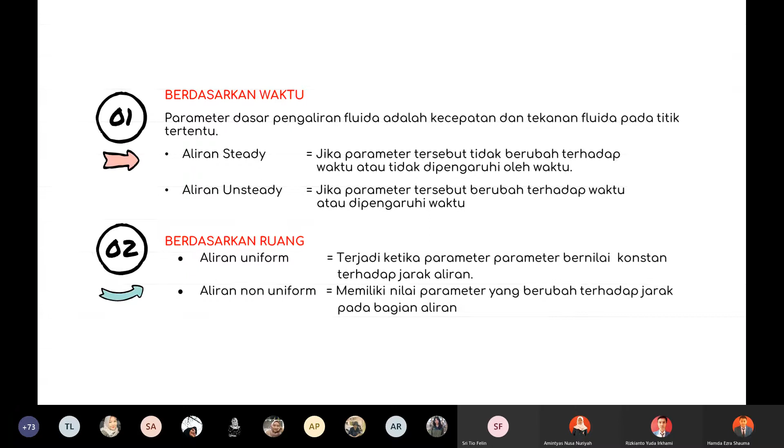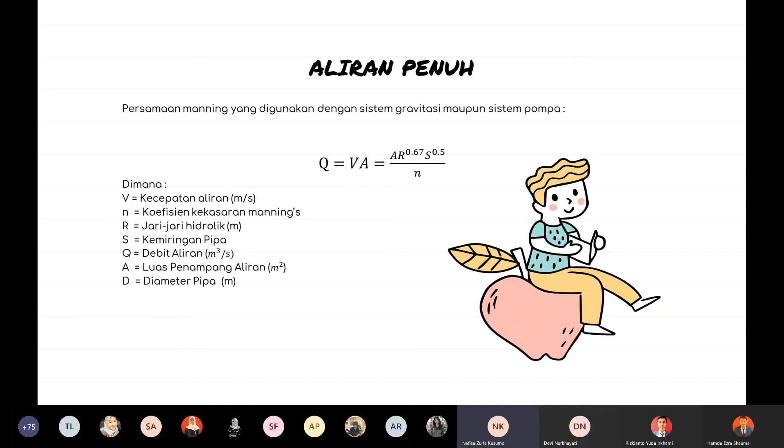In full flow, the formula for velocity and flow can be seen as follows. V is equal to 0.397 multiplied by S to the power of 0.5 and multiplied by D to the power of 0.67, then divided by Manning's coefficient. Q is equal to 0.312 multiplied by S to the power of 0.5 multiplied by D to the power of 2.67, then divided by Manning's coefficient. Flushing shall be designed so that the flow rate is not less than 0.8.

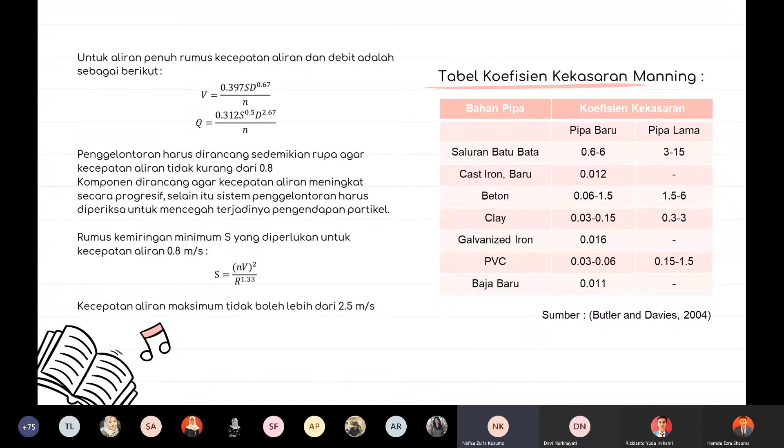The components are designed so that the flow rate increases progressively, and the flushing system should be checked to prevent particle settling. The formula for the minimum slope required for a flow rate of 0.8 meter per second is S equal to n squared multiplied by v squared, divided by R to the power of 1.33. The maximum flow speed shall not be more than 2.5 meter per second. On the right side, you can see the Manning-Roughness coefficient table based on Butler and Davies' book.

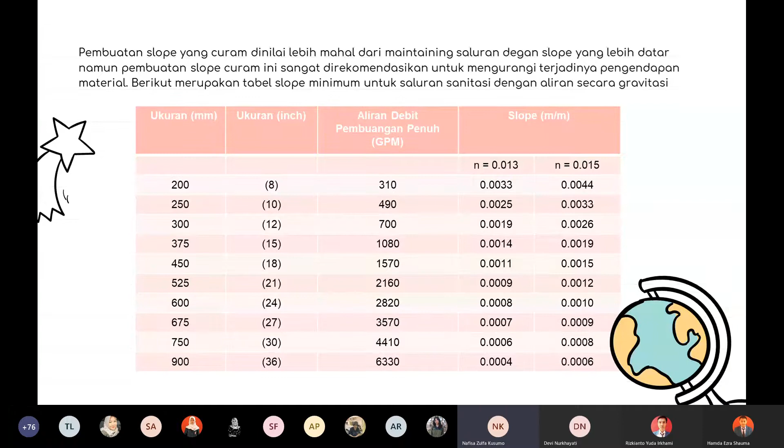Calculation of the average discharge and average velocity in this flow can be analyzed with the Manning equation. Factors that influence the measurement, such as the determination of A, P, and RH values and the roughness of the Manning coefficient, are considered based on the ratio of flow depth to diameter.

The spreadsheet graph illustrates the measurement of the trigonometric geometric equation for wet cross-section area, wet circumference, hydraulic radius, and top width measure. This measurement is popularly used in partially full pipe flow analysis. Full volume and full discharge are calculated at full flow condition in pipe by the Manning equation. Then V and Q can be found from various flow depth by reading the graph values.

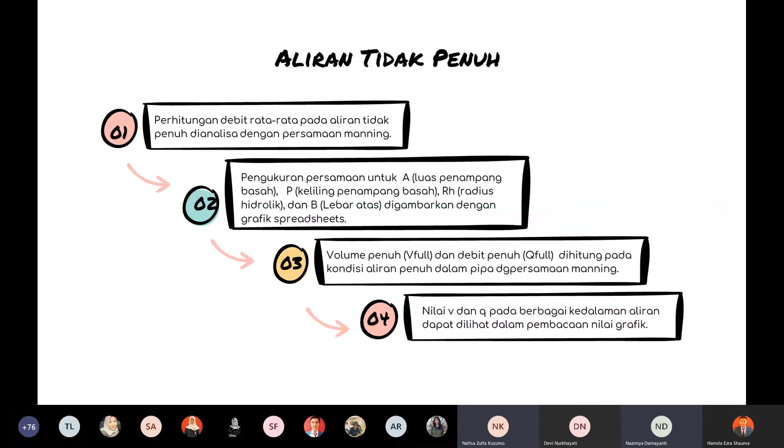For example, a water pipe with a diameter of 300 mm flows half full. We are told to specify the value of D, A, or wet cross-section,

top width, and dm. D is equal to 0.15 meter. A is equal to pi multiplied by D squared and then divided by 4. After that, multiply the result with 0.5.

From the formula, we know that A is equal to 0.0353 meter square. P is equal to pi multiplied by D and then divided by 2, which is equal to 0.471 meter. R is equal to A divided by P.

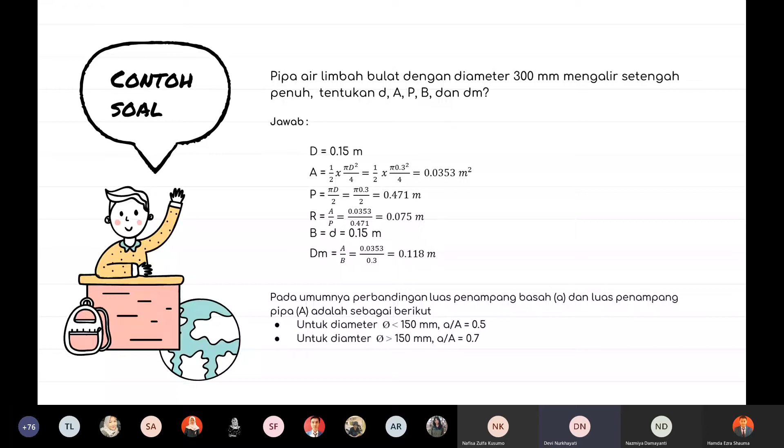The result is 0.075 meter. B has a value equal to D of 0.15 meter, and for Dm, equal to A divided by B, is equal to 0.118 meter.

Okay, next is about energy loss. Energy loss can be described as the change in flow velocity in the outlet pipe. The energy loss equation can be seen on the screen, which is energy loss equals 1.0 multiplied

by the average velocity to the power of 2 divided by 2 multiplied by gravity, minus channel velocity downstream to the power of 2 divided by 2 multiplied by gravity, where V means the average velocity at the outlet pipe in meters per second.

If the channel velocity downstream is equal to 0, as in the reservoir, the energy loss value is equal to the velocity value. In the case of an outlet pipe equipped with a shut-off valve which functions to prevent backflow to the system, the energy loss due to the valve also needs to be taken into account.

However, information on the shut-off valve is required from the pipe manufacturers. For partially full flow, energy losses can be reduced to nearly zero.

Next, about energy loss due to the pipe bends. The energy losses caused by bends in the pipe are minor energy losses which can be calculated by the equation: energy loss due to pipe equals 0.0033 multiplied by delta multiplied by initial flow to the power of 2, divided by 2 multiplied by gravity, where delta is the bend angle of the pipe.

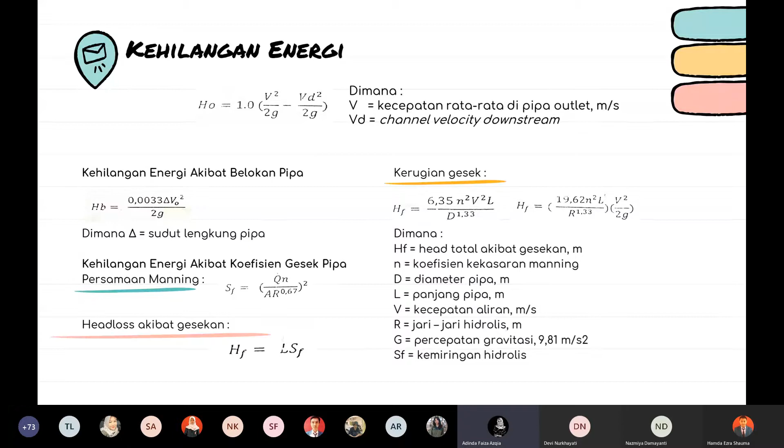Next, I'm going to present about gravity flow domestic wastewater pipeline. Gravity flow is a method of flowing domestic wastewater in pipelines by utilizing the energy difference from the elevation difference between the upstream and downstream points of the pipe. The difference in elevation is designed by adjusting the pipe slope so that the domestic wastewater in the pipe can flow at a certain speed.

The discharge of domestic wastewater in the pipeline is highly dependent on fluctuation in domestic wastewater flowing in from the source. Therefore, the piping network must be designed to meet the condition of minimum debit, average debit, and maximum debit. Gravity flow domestic wastewater pipeline will only be planned under partial condition or with a ratio of 0.6 to 0.8.

This is done to ensure that there is still enough airspace above the surface of the water so that atmospheric pressure is still available and to prevent excess capacity that can result in the overflow of domestic wastewater through manholes or inspection holes. As explained before, this method uses the Manning equation as well. Next.

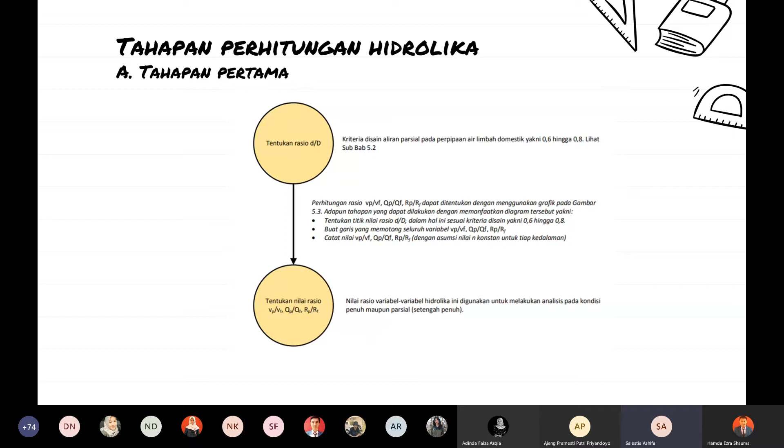Next is the hydraulic calculation, which is divided into two steps. The first step is we have to determine the d/D ratio and then determine the ratio of velocity in partial condition and velocity in full condition, ratio of flow rate in partial condition and flow rate in full condition, and ratio of radius of partial condition and in full condition. Next.

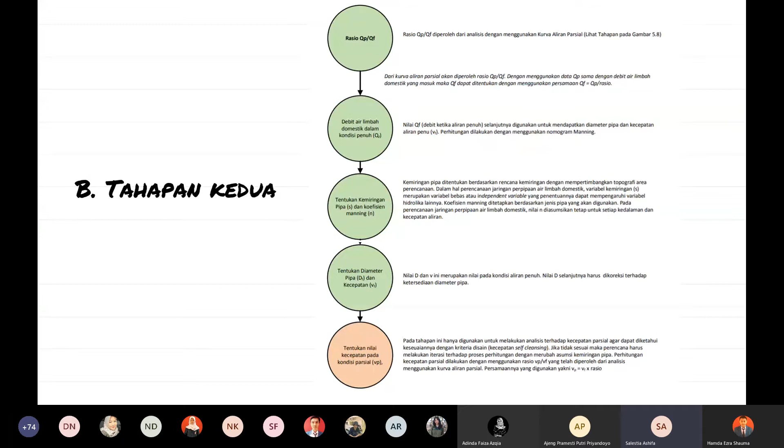And the second step is we have to determine the ratio of flow rate in partial condition and full condition, and determine the flow rate of domestic wastewater in full condition, and then determine the pipe slope and the coefficient of Manning equation, then determine the diameter of the pipe and the velocity, and then determine the velocity in partial condition. Next.

This is the nomograph example. Here, it is known that the quantity of flow is 0.6 cubic meters per second. The pipe length is 130 meters and the pipe diameter is 875 millimeters. So how to find the slope and the time of flow to the next station?

First, what we should do is mark what is known, like the quantity of flow, pipe length, and pipe diameter, and then draw a straight line from the quantity of flow line until it reaches the velocity line. After that, record the numbers that the line crosses. Here, we got the slope, which is 0.005, and the velocity is 1.8 meters per second.

After that, draw the line again from velocity in pipe across the pipe length to time of flow to next station, or delta TC, and then record the time of flow, which is 1.4 minutes. Next.

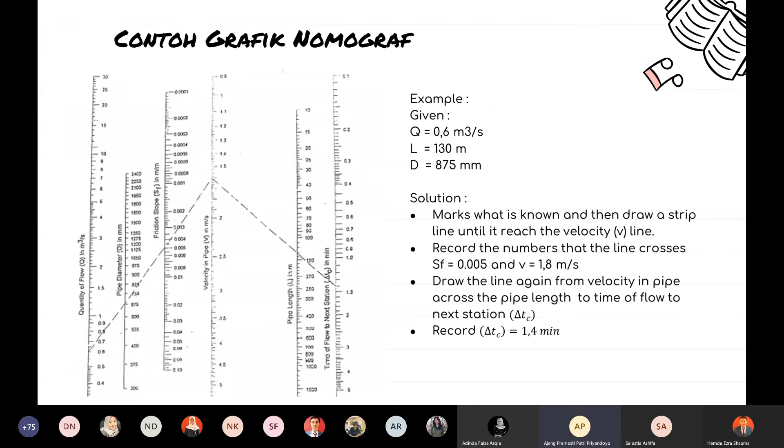Okay, this is an illustration of the flow of domestic wastewater through a pressurized sewer. Pressurized sewer is one of the methods of domestic wastewater disposal that can be selected in the planning of the service subsystem and collection subsystem. This method can be selected for certain service areas which technically cannot be flowed by gravity due to the lower topography of the main pipe.

The pressurized flow method operates by using a pump to push domestic wastewater from the collection tank to the nearest domestic wastewater pipeline. In its operation, domestic wastewater from the source is flowed by gravity to a collection tank, which also functions as a pumping station. Furthermore, the pumping of domestic wastewater is carried out based on the elevation of domestic wastewater in the collection tank.

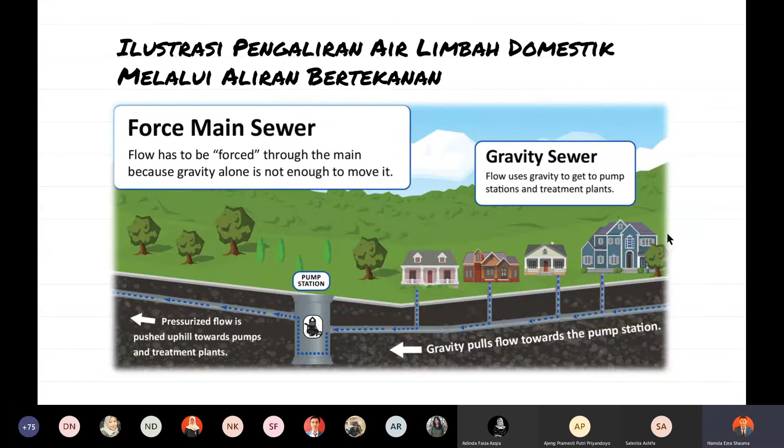Next is the Hazen-Williams equation. The hydraulic analysis of the pressure flow pipe can be carried out using the Hazen-Williams equation. This equation was developed to relate the physical characteristics of pipe to change in pressure due to friction between the fluid and the pipe. There are two equations. Equation 1 is used to calculate the discharge.

The discharge is equal to 0.278 times C times D to the power of 2.63 times S to the power of 0.54. In this formula, C is the Hazen-Williams coefficient, D is the inner diameter of the pipe, and S is the slope of the hydraulic gradient. Equation 2 is to calculate head loss, where L is the length of the pipe, Q is the discharge, and D is the inner diameter of the pipe. Next.

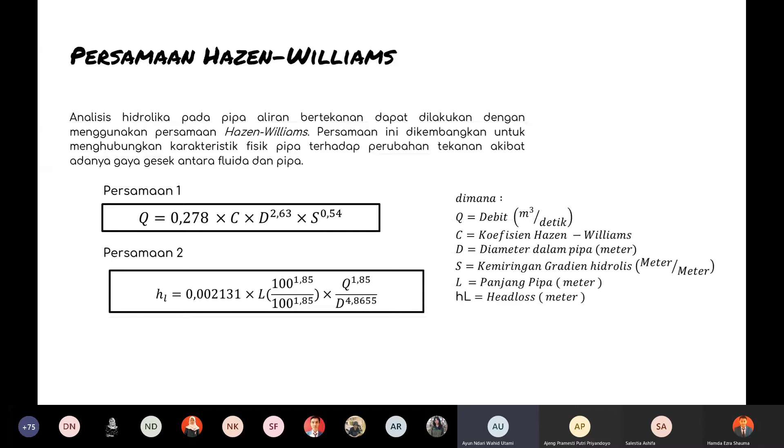Okay, next is the hydraulic calculation step. To analyze the Hazen-Williams equation with other C values, we need a correction factor, which we can see from the table above. Next.

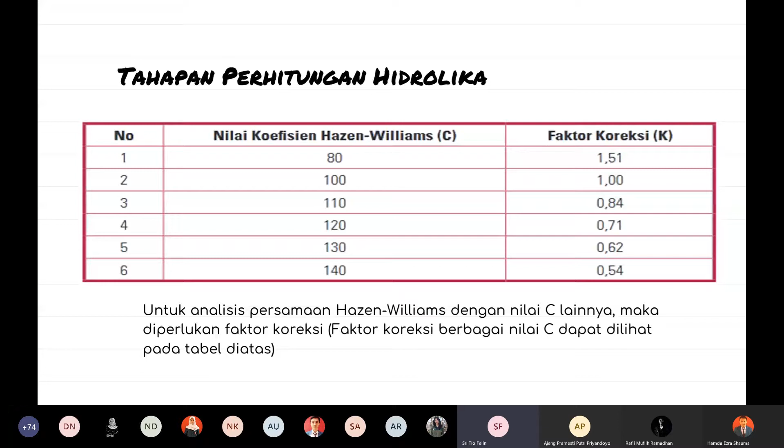And the steps for calculating hydraulics: there are two steps. Step 1 is determine the value of diameter or D, pipe or pump discharge or K. The analysis of hydraulic variables uses the Hazen-Williams nomogram, starting from determining the dimension of the pipe or discharge of wastewater and head loss. The pipe diameter for the pressurized flow can be determined considering the dimension of the outlet pipe on the available pump. In this case, the wastewater discharge is the pump discharge.

Calculation of head loss or HL, diameter or D, and velocity or V variables can be determined using a nomogram graph. The steps are: first, determine the point value of K; second, determine the point value of D; third, draw a line that cuts across the K, D, HL, and V variables; and the last step, note the values of K, D, HL, and V. And the final step is for velocity, diameter, or head loss. The values of the hydraulic variables that we get depend on the initial data that we used in our planning before. Next.

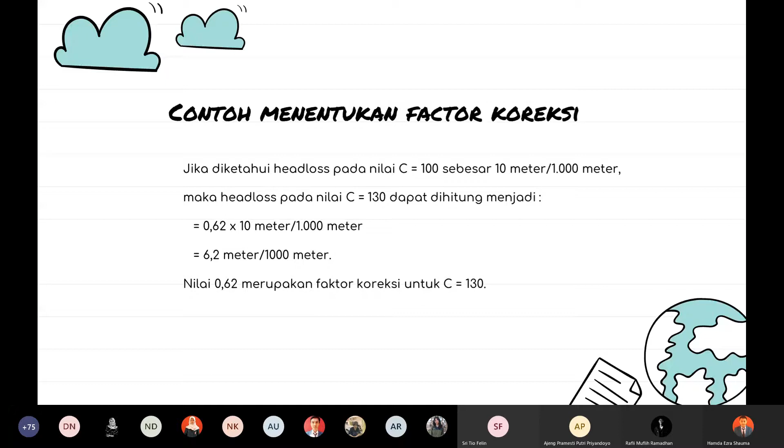Next is the pumping hydraulics material from the Metcalf and Eddy book. I will explain the fundamentals of pipe and open channel flow. The following terms are basic to understanding both pipe and open channel flow. Firstly, laminar flow. Laminar flow involves the mixing of fluid particles on a molecular scale so that when in motion, the fluid particles move in parallel paths under the action of viscosity. Secondly, turbulent flow. Turbulent flow involves the mixing of fluid particles on a molar scale so that in motion an exchange of momentum occurs between fluid particles, which results in the rapid and continuous mixing of the fluid.

Thirdly, pipe and open channel flow. The flow of liquid in a conduit might be classified as pipe or closed conduit flow or open channel flow depending on whether the free liquid surface is subject to atmospheric pressure. Fourthly, head loss. Head loss is the energy loss that occurs when liquid flows in the pipe and open channel. Fifthly, hydraulic grade line. The hydraulic grade line is a line connecting the points to which the liquid will rise at various places along any pipe or open channel if piezometer tubes are inserted in the liquid.

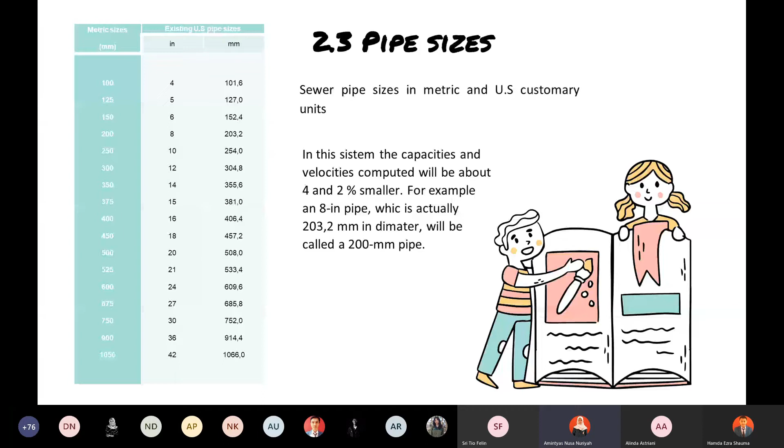And then these are design charts. The first is sewers flowing full. As mentioned previously, the Manning equation is the most common in sewer design. The most direct method of using this equation to solve problems in sewers and pipes in general is by preparing a nomograph. The values of factor n for Manning were selected for this diagram, so we can find diameter and velocity from the nomograph. This is one example of a nomograph. By following the design and drawing from the bottom and left side, we will get a meeting point. And from that meeting point, we get the diameter and velocity.

And this is sewers flowing partly full. Almost all sewers now constructed are circular in cross-section. The relation between hydraulic elements for flow at full depth and at other depths in sewers is computed according to the Manning equation. The hydraulic elements for circular sewers are the hydraulic radius R, the cross-sectional area of the flowing stream A, the average velocity V, and the rate of discharge Q. In the past, a wide variety of non-circular sewer sections were used, including egg-shaped, semi-elliptical, horseshoe, basket handle, oval, parabolic, and elliptical. Next.

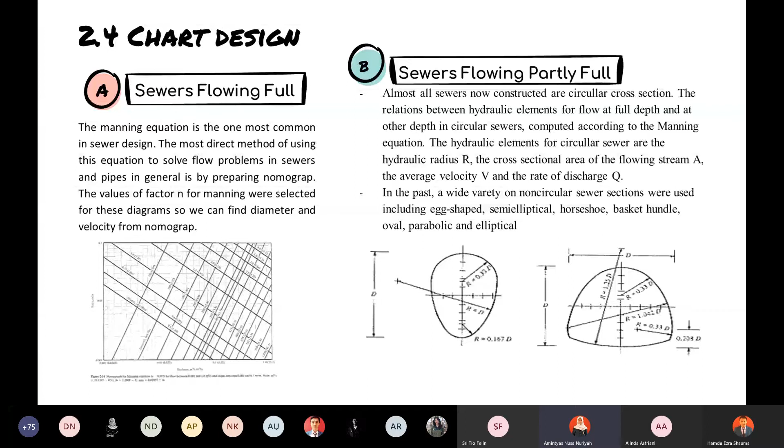So I want to do minor losses, or head loss minor. What is this? Minor losses, or head loss minor, are head losses in a sewerage system that typically occur where the magnitude or direction of the fluid velocity changes. Minor losses can usually be expressed as a function of the square of representative fluid velocities. Minor losses in closed conduits are somewhat different from those in open channels. So this is closed conduit flow minor losses.

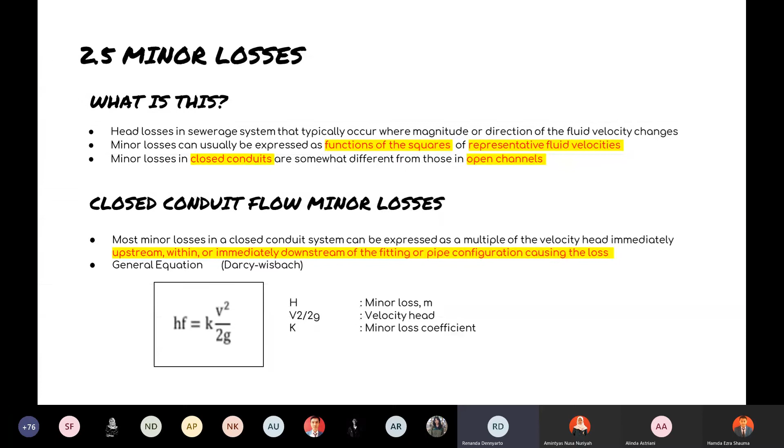Most minor losses in closed conduit systems can be expressed as a multiple of the velocity head immediately upstream, within, or immediately downstream of the fitting or pipe configuration causing the loss. So this is a general equation from Darcy-Weisbach, where head loss minor equals K times V squared divided by 2g, or gravity. Next.

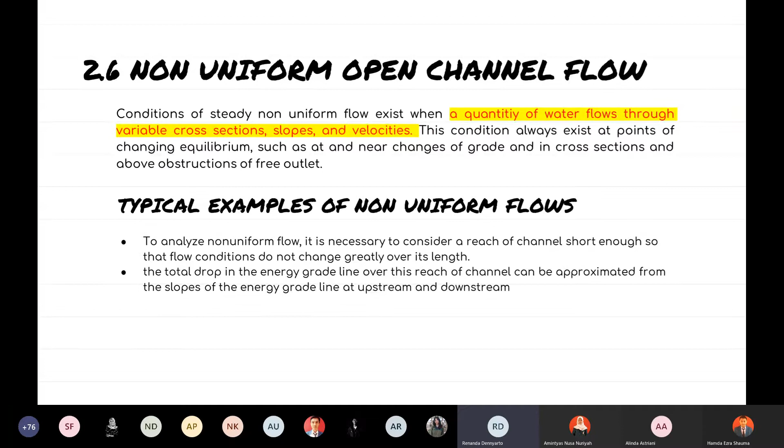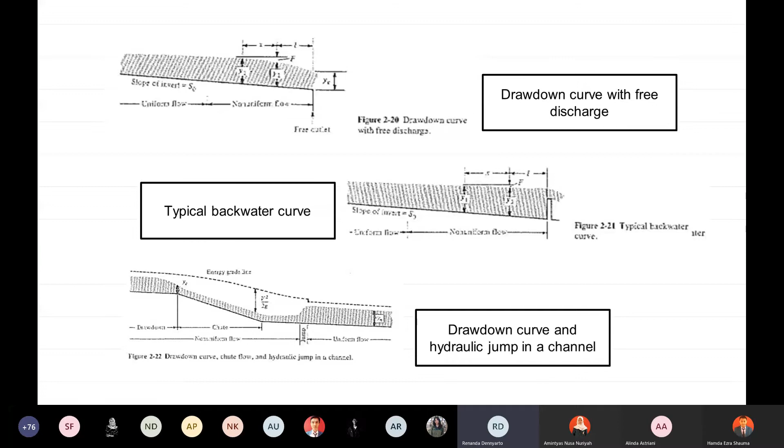Non-uniform open channel flow. Conditions of steady non-uniform flow exist when a quantity of water flows through variable cross sections, slopes, and velocities. This condition always exists at points of changing equilibrium, such as at and near changes of grade and in cross sections, and above obstructions or free outlets. So this is a typical example of non-uniform flow. Next. This one is a drawdown curve with free discharge, a typical backwater curve, and a drawdown curve and hydraulic jump in a channel. Next.

The first journal is Application of LabVIEW for Dynamic Simulation of Hydraulic Piping Systems. LabVIEW is best known as a programming environment for data acquisition and analysis and has reached broad use throughout the scientific and industrial communities. LabVIEW has gained experience as a simulation environment for dynamic analysis of piping systems with the method of characteristics, or MOC. Transient simulation of hydraulic piping systems consists of simultaneous solution of the 1D wave equation, that relates flow to the pressure in a pipe, and solution of all other non-pipe components constituting the total system.

The method of characteristics, or MOC, is the most widely used method due to its analytic accuracy and speed. This presents an implementation of MOC as a toolkit in LabVIEW. Each type of physical component, including pipe, valve, and others, is programmed as a component sub-VI, or component sub-virtual instrument. Hydraulic systems with virtually limitless complexity are then constructed intuitively using a point and click method in the standard LabVIEW interface and later run without needing any prior knowledge of LabVIEW.

The modularity means that new components and upgraded components are easy to incorporate, while the LabVIEW interface provides all the interactive graphical representation, both in batch mode and real-time simulation. This toolkit is implemented in a package called LVTrans, or LabVIEW Transient Simulation. Next.

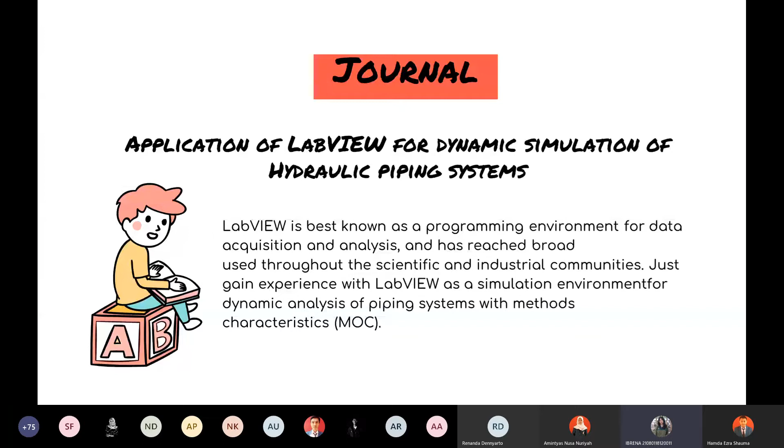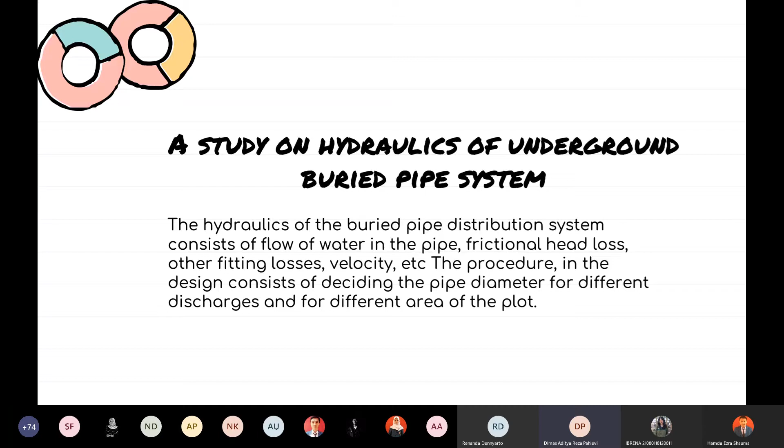Okay, the second journal is A Study on Hydraulics of Underground Buried Pipe Systems. For the design of the pipe system for water supply from buried pipes and for efficient irrigation, it is necessary to know the hydraulics of the pipe system. The hydraulics of the buried pipe distribution system consists of flow of water in the pipe, frictional head loss, other fitting losses, velocity, etc. The procedure in the design consists of deciding the pipe diameter for different discharges and for different areas of the plot. Next.

For the next journal, the title is A New Methodology for the Optimal Design of Series of Pipes in Sewer Systems. And what we got in this journal is that an optimal hydraulic design of a series of pipes is one which satisfies all the hydraulic, commercial, and construction constraints while minimizing the construction cost. The sewer network design problem consists of, first, determining the layout, and second, the hydraulic design of the system.

The layout of the network is defined by the initial pipes and the flow direction of each pipe. Then, the hydraulic design determines the diameter and the slope of the pipe to be installed at each link of the sewer network, where a link refers to the span between two manholes. Sewer network design involves two different problems, as I told before, the layout and the design, due to their complexity. So, the available solution strategies in the literature propose solving both problems sequentially, but the hydraulic design problem has received more attention. Next.

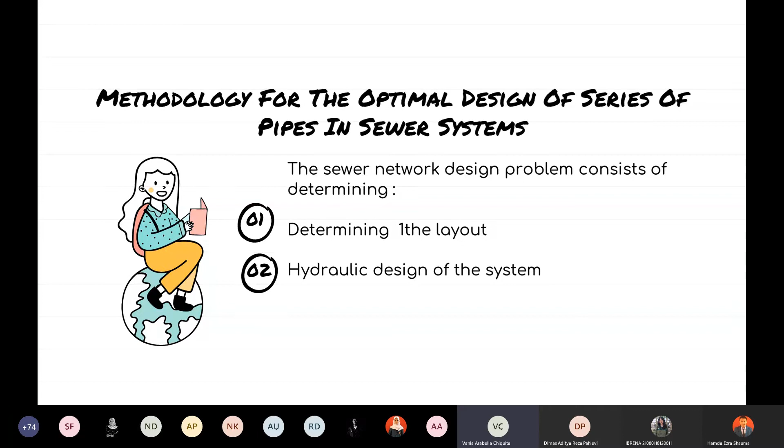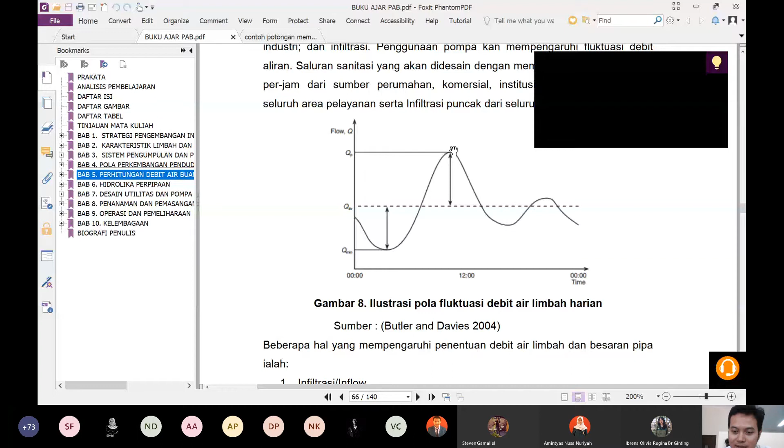Silakan jika ada yang ditanyakan. Sembari ini kita lanjutkan, saya cari file dulu.

Mau tanya Pak, permisi. Perkenalkan nama saya Dini Pak. Mau tanya ada dua hal. Pertama, untuk jangka waktu perencanaannya sendiri itu berdasarkan apa ya Pak? Apakah ada kewajiban misal ditetapkan 5 tahun atau 10 tahun? Kemudian yang kedua, untuk penentuan dimensi pipa, kenapa pakainya Qpeak bukan Qfull? Karena waktu itu saya pernah pengalaman hitung di Excel, jumlah Qfull-nya malah lebih besar daripada Qpeak-nya. Gitu Pak, terima kasih.

Oke, ini kamu mau ngulangi ya? Kok tahu ada Qpeak-Qfull? Iya Pak, iya.

Oke, saya belum lanjut sampai terakhir. Jadi perhitungan infrastruktur lingkungan itu biasanya menggunakan dimensi waktu yang panjang karena investasinya besar, terutama air limbah itu biasanya menggunakan dimensi 40 tahun pada pipa primernya, sehingga ketika ada pertumbuhan wilayah dan dia berkembang terus, pipa tersebut masih mencukupi.

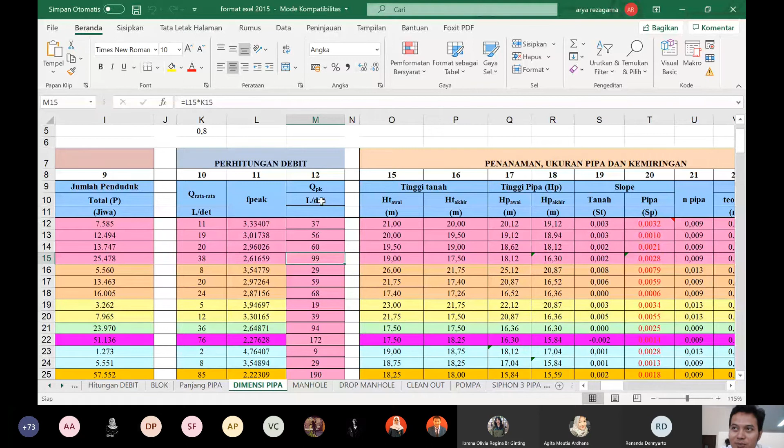Jadi berapa tahun? Kalau SPAM itu rata-rata bisa 20 sampai 25 tahun. Kalau PAL itu bisa lebih panjang, karena konstruksinya jauh lebih rumit. Kalau di luar negeri, air limbah itu sudah berumur 50 tahunan lebih dan masih terawat. Kalau di Indonesia, rencana pengembangan PAL itu bisa sampai 40 tahun. Seperti itu.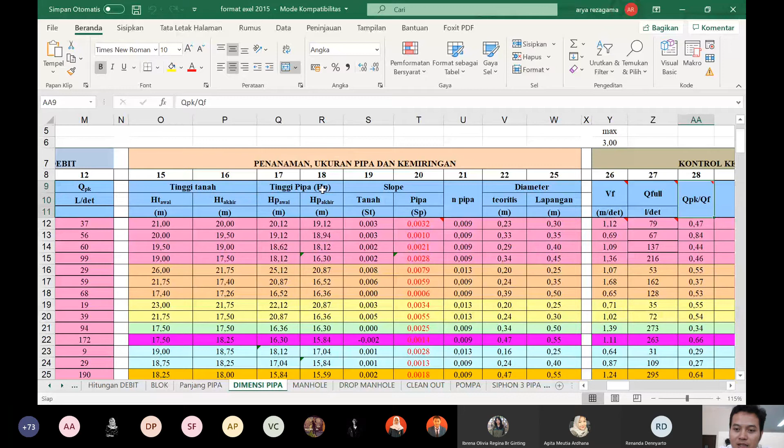Kemudian kita lihat sekarang, Qfull, Qpeak itu apa sih? Di sini memang ada perhitungan Qpeak per Qfull. Jadi memang benar yang disampaikan tadi, menggunakan Qfull dalam perhitungan dimensi pipa. Nah ini biar kalian nggak bias, nggak bingung. Saya belum menerangkan sampai sini, tapi ini untuk besok. Tapi saya akan jelaskan pada gambar berikut.

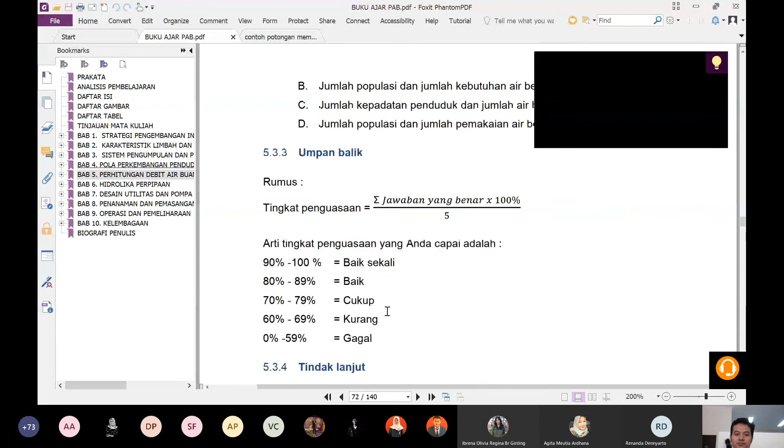Jadi di sini ada beberapa istilah yang perlu kalian ketahui. Ada Qpeak per Qfull, kemudian ada d kecil per D besar. Dalam menentukan dimensi pipa itu benar menggunakan Qfull, tapi data Qfull itu didapat dari Qpeak. Pada suatu jaringan air limbah, air itu tidak boleh menutup seluruh pipa, artinya dia akan menjadi pressurized pipe. Kalau air minum dia pressurized, air bertekanan, pipa bertekanan. Kalau ini dia harus ada rongga udara yang tetap ada di dalam pipa.

Maka debit sebenarnya yang bisa diambil, debit perencanaannya itu menggunakan Qpeak, di mana Qpeak ini sebenarnya di dalam pipa itu belum terisi penuh. Jadi pipa isinya mungkin 100 liter per detik, tapi itu kalau full. Tapi di dalam desain kita hanya mengisi dia paling 60%, 70%. Artinya mungkin dia hanya terisi 50 sampai 60 liter per detik. Maka dia ada rongga udara di atasnya.